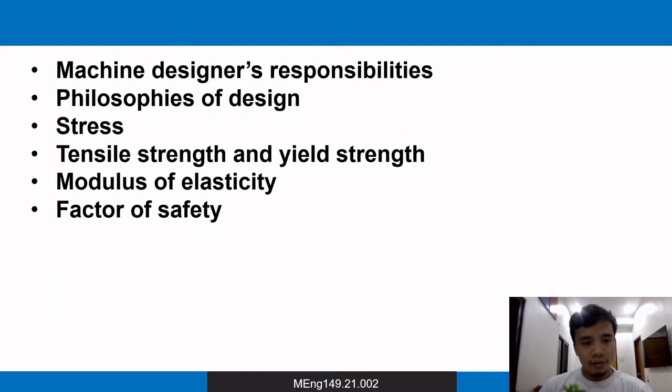Like the famous adage, necessity is the mother of invention. Every machine is born out of a real or imagined need for it. This idea may then evolve into a conception of methods and process in order to accomplish the purpose.

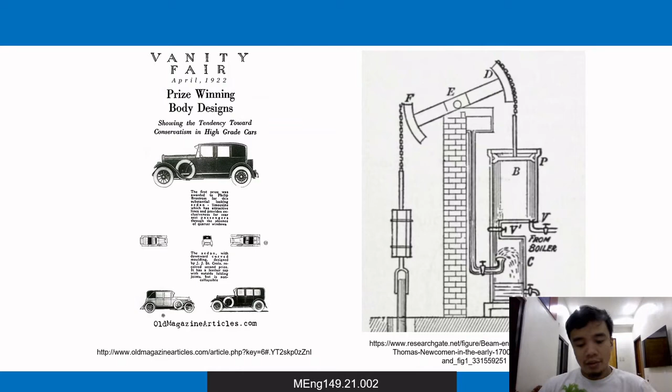What follows may be the arrangement of parts, the location and lengths of the links, which may include the kinematics of the machine, which only considers the motion of all the linkages and parts of a mechanism or machine, as well as the basis for gears, bolts, springs, cams, and other elements of machines.

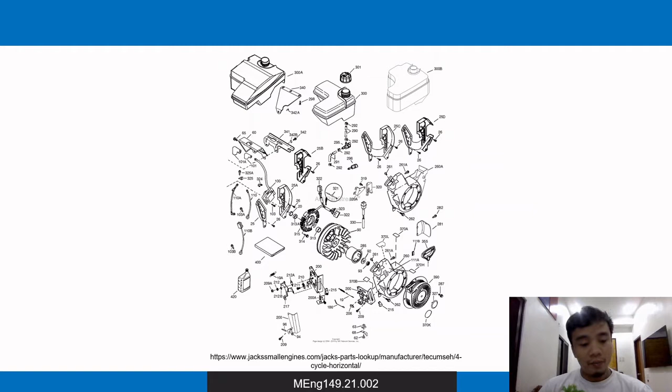The practice of designing is applying a combination of scientific principles and judgment based on experience. In other words, it is a combination of theoretical and empirical knowledge. Theoretical is what we read in the book, and empirical is based on experience or experimental data.

We always think of an invention as something or someone who starts from scratch and creates a new design and machine. What we don't know is that even though the inventor has created a machine we have never seen before, they use ideas that have already been known, in combination with other components and concepts that are already available.

Most designs follow a pattern familiar to and typical of an industry, whether it's a car, a sewing machine, a washing machine, or a refrigerator, seemingly similar to the previous one.

So, in other words, in the design, while there are improvements, the new versions or new models are seemingly similar to the older ones.

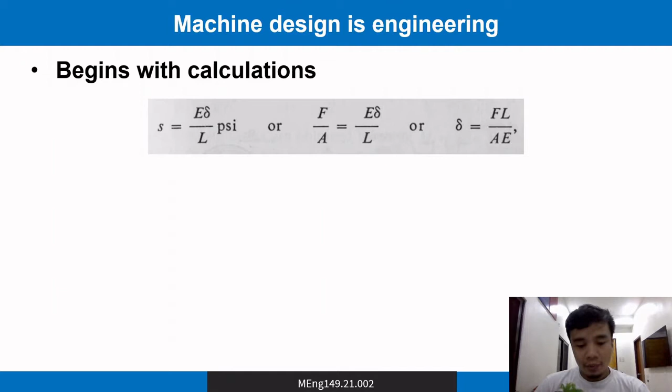Then each element is designed so that it will perform its function without failure. In doing so, we use the principle of strength of materials. So we have completed the course strength of materials, and the knowledge you have gained will be used or applied in solving engineering problems.

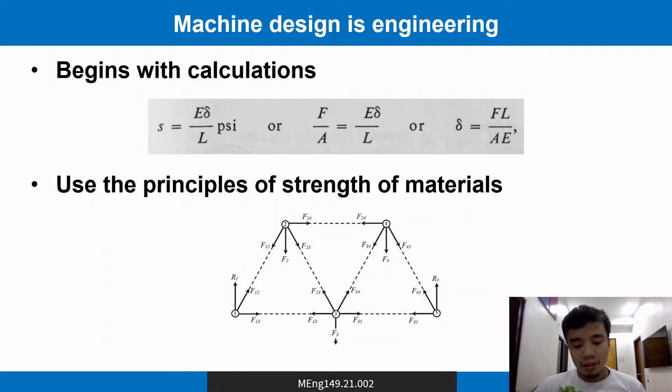In this machine design course, you will use these principles to find suitable dimensions of machine elements, and in the process, the designer does a stress analysis. This stress analysis will involve designing the various parts of the machine elements that are subjected to maximum stress.

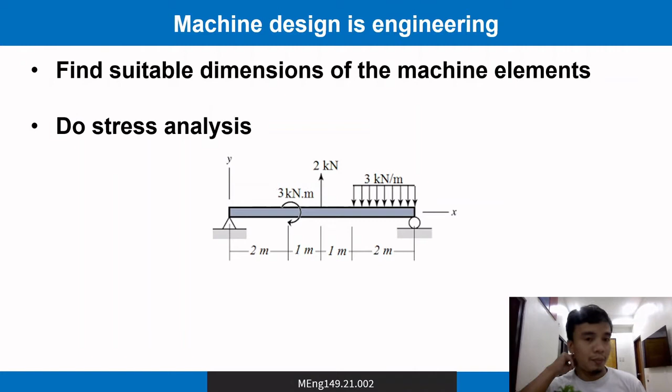Stress analysis is an essential process or part of machine design. But most important is the judgment, since it is seldom possible to use theoretical equations to determine and adapt the result right away.

So the designer must use their judgment to decide if the calculated dimensions and type of material suggested from the book are practical accordingly in real life. It is in the prerogative of the designer to judge if the calculated figures are practical in real life.

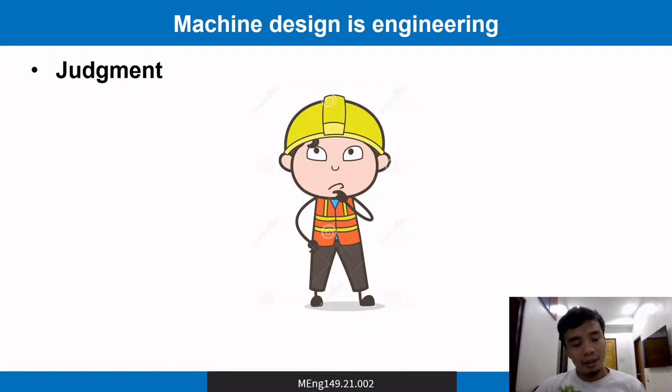So now let's go with stress. This is already known to you from your previous materials, and you'll be encountering it most in this course. In this course, the term stress refers to the unit stress, which is measured in pounds or kips per square inch.

A kip is a unit of force that is equivalent to 1,000 pounds. Kip is actually a contraction of kilopound, so instead of saying kilopound, it is contracted into kip.

So these are for tensile stress and compressive stresses. Stress is denoted by small letter s, and tensile and compressive stresses are denoted with T and C respectively. Since stress or unit stress is equal to the applied force or applied load over the cross-sectional area, the load is denoted by F and the cross-sectional area is A.

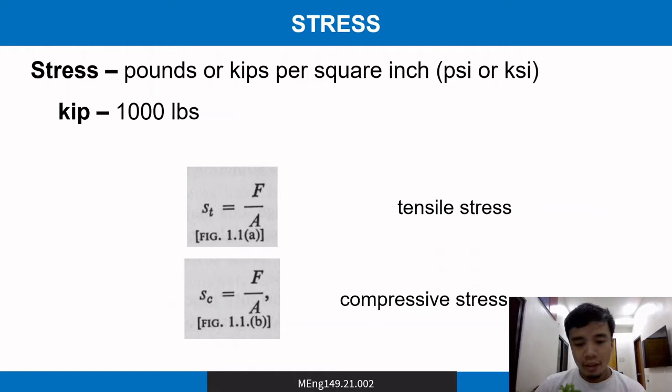Our general assumption here is that the line of action of the load F or force is at the center of the cross section. Throughout this course, we'll be assuming that the location of application of the load is at the centroidal axis, meaning no scattering of loads along the cross section—it will be concentrated at the centroidal axis.

In the above figure, when a bar is in tension, the force F or load F is applied outward and tends to elongate the bar. This tendency of elongation has effects on the area and geometry of the bar. In the figure below, the load F is applied inward, so the forces tend to shorten the bar.

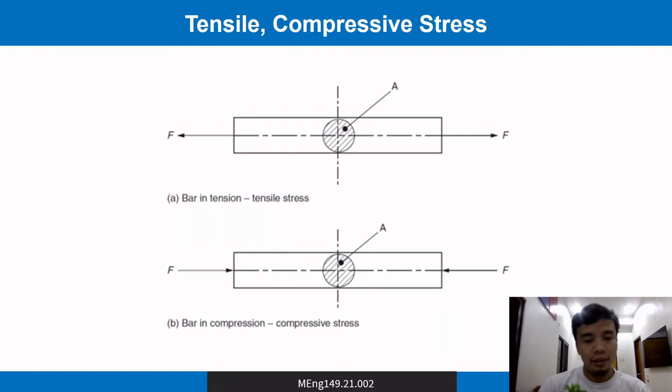Now let's take a closer look at the bar when applied with compressive or tensile loading. The bar or any member, when subjected to the action of a force, will be deformed. As you can see, the bar was applied with tensile loading—exaggerated here—there is an effect on the geometry, particularly the cross-sectional area of the bar.

This deformation not only affects the length, having the tendency to elongate the specimen, but also the area of the cross-section. A specimen subjected to tensile loading elongates and decreases its cross-sectional area. In contrast, when subjected to compressive loading, the specimen shortens and the cross-sectional area tends to increase.

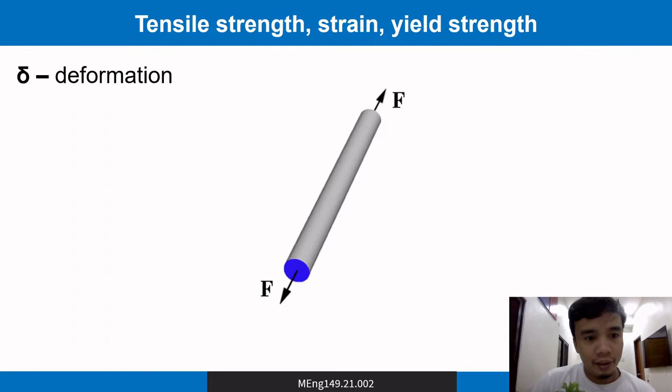This change in length is called deformation, denoted by the Greek letter delta. The deformation per unit length of the specimen represents a percentage increase or decrease in length, and it is delta L over L naught, where delta L is the total elongation and L naught is the original length of the specimen.

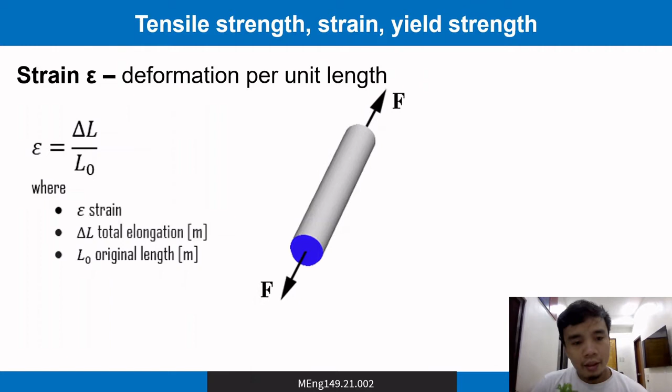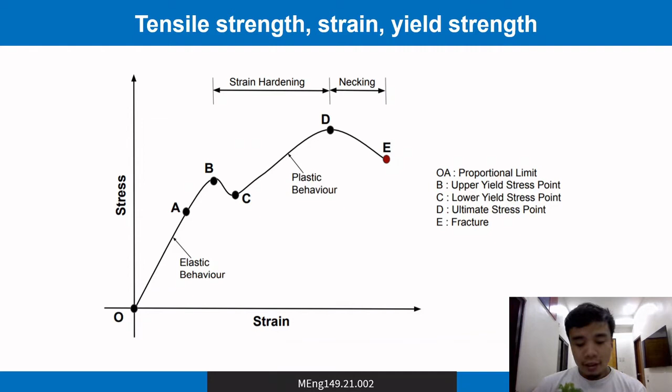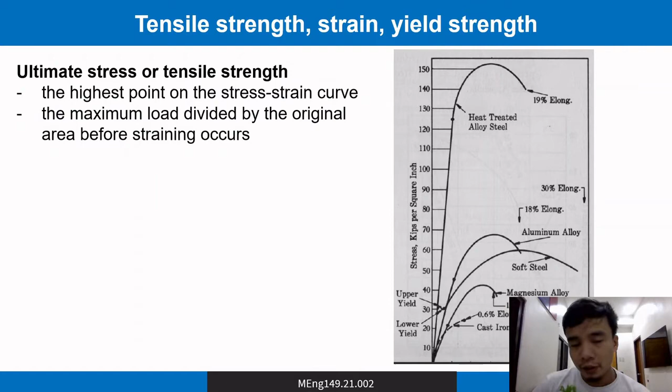The highest points in the curve, as mentioned earlier, are the ultimate. The specimen or material will sustain deformation, but it will not break. The end point of the curve is the so-called fracture or breaking point, where the specimen deforms outward—also called the failure point.

So let's go back to the stress-strain diagram of materials. We have the so-called elastic limit. The elastic limit is the maximum stress to which a specimen may be subjected without permanent deformation. The line below this elastic limit can be linear or not.

There's a terminology or parameter in the stress-strain curve that is coincident with the elastic limit, the so-called proportional limit. The stress is proportional to the strain. So at or below the elastic limit, the stress can also be proportional to the strain.

But not all materials will proceed with deformation before going through a proportional limit of deformation. So for the elastic limit, as you can see in the stress-strain diagram, the curve can be the proportional limit plus there are materials that will undergo significant deformation, but they can still return to their original length.

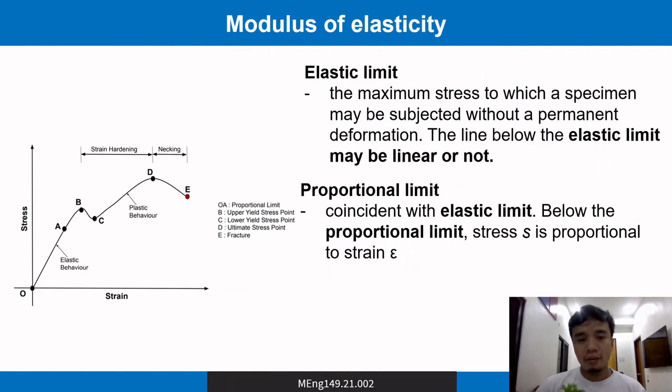Since stress is proportional to strain, if we express it as an equation, there must be a proportionality constant. The proportionality constant below the proportional limit is assigned as a constant, the so-called modulus of elasticity. This is represented by the equation: stress equals the modulus of elasticity times the strain. Since strain is the ratio of the elongation or deformation to the original length, it is basically dimensionless.

Therefore, the unit of the modulus of elasticity is the same as the unit of stress, such as KSI or PSI. Let's take a look at the equations for total deformation. Stress is equal to the modulus of elasticity times the strain. Since strain equals deformation over the total length, we have S equals the modulus of elasticity times delta over L, where delta over L is the strain.

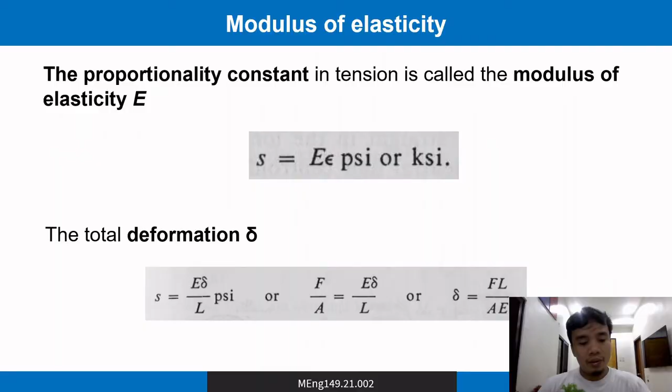With regards to modulus of elasticity, it is important to be familiar with the values for commonly used engineering materials, such as steel and wrought iron, which are common values used throughout this course and also in practice.

For steel, the modulus of elasticity in tension or compression is 30 times 10 to the power of 6 psi, or 30,000 ksi. The modulus of elasticity in shear or torsion, denoted by letter G, is 11.5 times 10 to the power of 6 psi. This is for steel.

For wrought iron, which is also another common engineering material, the modulus of elasticity in tension or compression is 28,000 ksi, while in shear or torsion it is 10,000 ksi.

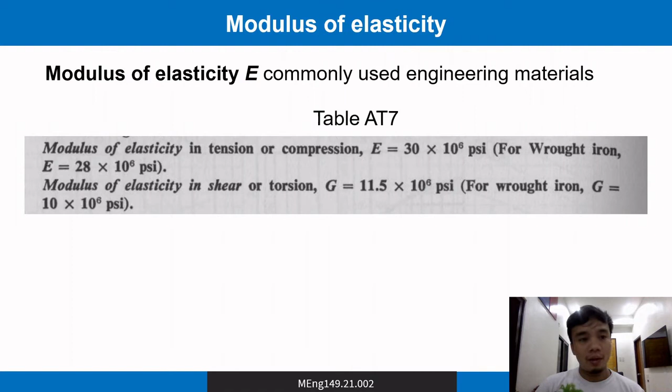Now there is a terminology that you may first hear in machine design, and this is the factor of safety, or otherwise called the design factor. This is denoted by the letter N. It is defined as a number that is divided into a criterion of strength in order to obtain a design criterion. This will be hard to grasp for you as of now, but let's talk about the concept of the design factor.

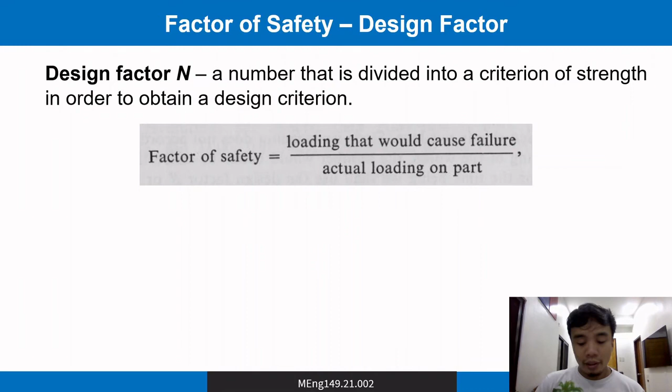The concept behind the usage of the factor of safety is that in design we cannot use the value of the ultimate strength or the yield strength of that material in the calculations right away, without using a factor, because the subsequent results when using the ultimate strength or yield strength would be too high risk for failure. So the designer should assign values below the ultimate strength or yield strength so that the design would be safer. This design stress is expressed by these equations.

This is denoted by S sub D. Ultimate strength and yield strength are divided by the design factor. Hence, the design stress when basing from the ultimate strength is represented by this equation, and the design stress basing from the yield strength is represented by this equation.

So you can see here that there are two design stresses - the design factor based on ultimate strength and the design factor based on the yield strength, because the material has two possible maximum strengths.

One is the ultimate strength, which is the value of the strength of material before failure occurs, and the yield strength is the strength of material where irreversible deformation of that particular material occurs.

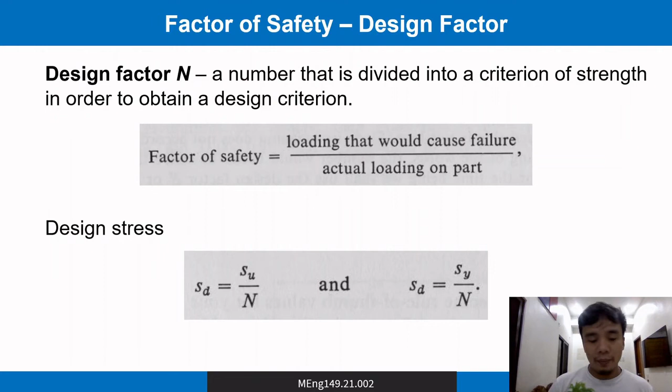There are criteria that must be considered in designing what design factor to be used. So take a look at Table 1.1. This can be located in page 20 of the reference book. Here in this table, there are four specific criteria in selecting the design factor.

If the type of loading or the foreseen type of loading for this element is a dead load, then there is a corresponding design factor, which also varies for the type of material, whether it is steel, ductile metal, cast iron, or timber. So for repeated one direction gradual or ungradual loading, there's a corresponding design factor for that. Also with repeated reverse gradual, and shock.

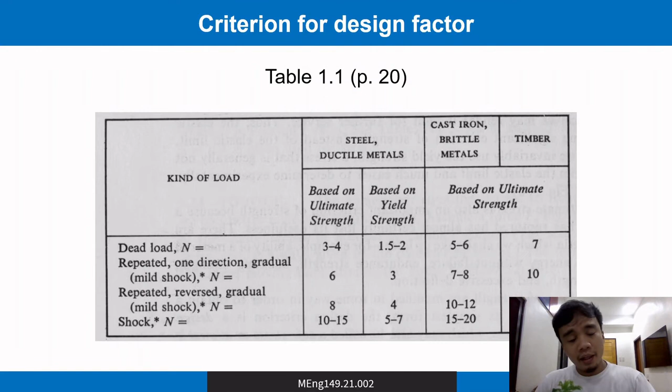As you can see here, as the type of loading involves a higher degree of shock into a machine element, the design factor increases. These uncertainties affect the magnitude of the design factor. So designers cannot be certain as to what extent of the machine element's life can handle a particular type of loading.

So whether this machine element, throughout its lifetime, will only be repeated - what if there could be a shock load in its lifetime? So those are the uncertainties that need to be considered by the designer. With regards to loading, is there a possibility of shock loading, or will it perpetually carry repeated gradual loads? Is the material completely homogeneous that we can assume uniformity of resistance? These questions constitute the uncertainties associated with designing machine elements.

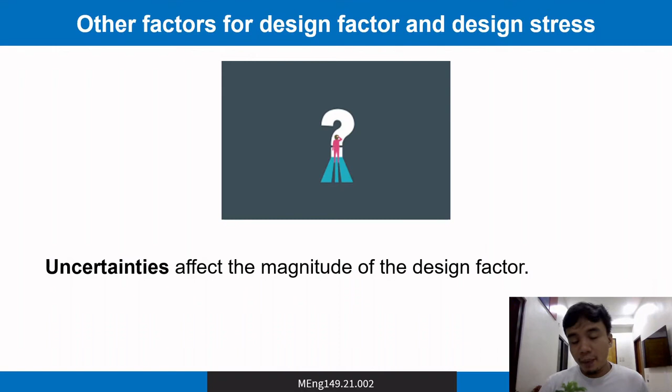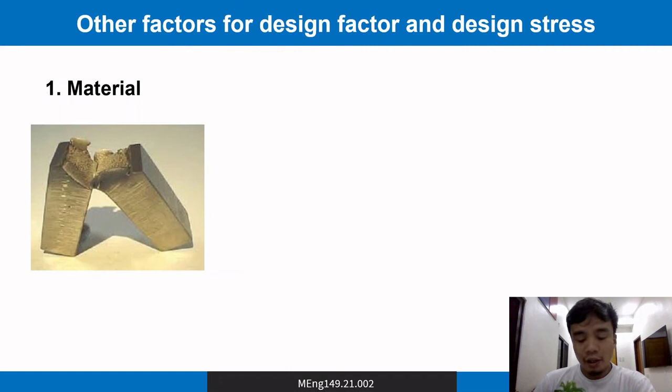Below are the factors that affect the magnitude of the design factor. First is the material - complete information about the material is not generally available. This is true in practice. There will be possibility of internal flaws, improperly controlled treatment of the metal. If the designer is not completely certain with this material information, a higher design factor is recommended.

Second, the size effect. It is known that failure of large parts occurs at lower stresses.

Thus, it is suggested to use a higher factor of safety for large sizes of the same family of materials. So for bigger sizes of a particular machine part, even with the same family of materials, a higher design factor is recommended.

Next is the type of loading. As discussed earlier in Table 1.1, the criterion for that is the type of loading. Determining the service loading throughout the lifetime of a machine is practically impossible. As posed earlier: will the type of loading be consistent throughout its lifetime? Is there a possibility of shock load? Those are the uncertainties with regards to the type of loading.

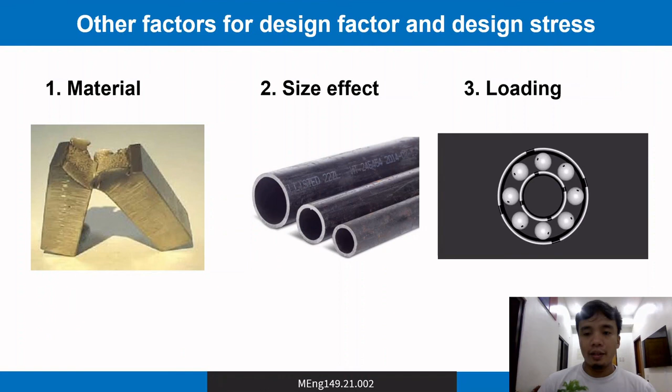Machines will undergo different types of loading in its lifetime. While estimates are essential, deciding based on experience is way more practical. So when the nature of loading is known in some detail, a lower design factor is suggested. Otherwise, the designer should decide on a higher design factor.

The computed average stress can be viewed with considerable confidence, especially for simple stresses, because simple stresses are relatively easier to compute due to the nature or geometry of the elements, or the location of loading applied to these elements. However, for elements with complicated shapes and thus non-uniform stresses, uncertainty increases. One may determine stress experimentally, but the figure may deviate significantly or may not exist in the design.

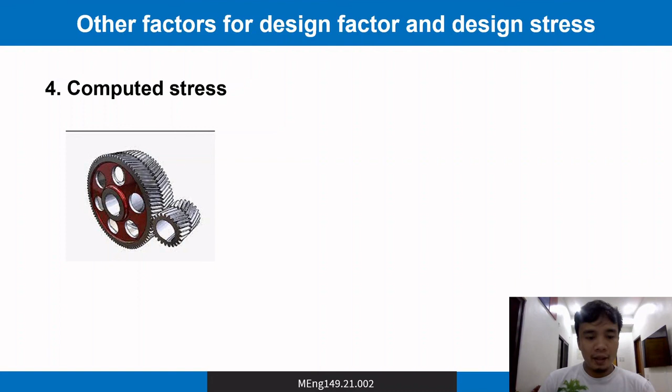So, when there is uncertainty regarding the confidence of the computed stress, especially when dealing with complex shapes, non-homogeneous materials, and the location of loading, it is recommended to use higher design factors.

Next is the environment. Machines are typically operated in a dusty, corrosive, or oily working environment. These environments may result in cracking, roughened, or smoothened material surfaces, which could considerably affect the material integrity. So, if throughout the lifetime of this machine element it is used in these dusty or corrosive environments, a higher design factor is also suggested.

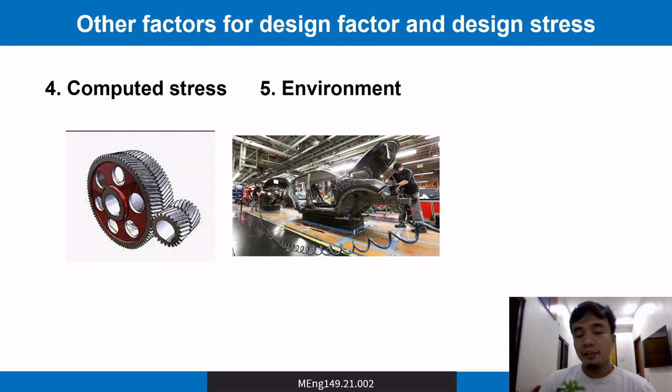Next is the inspection. The inspection revolves around the thoroughness and strictness of the material inspection before it is rolled out for usage in the manufacturing of these machine elements. This could also affect the magnitude of the design factor. So if it is known that the quality of inspection is not high, a higher design factor is also considered.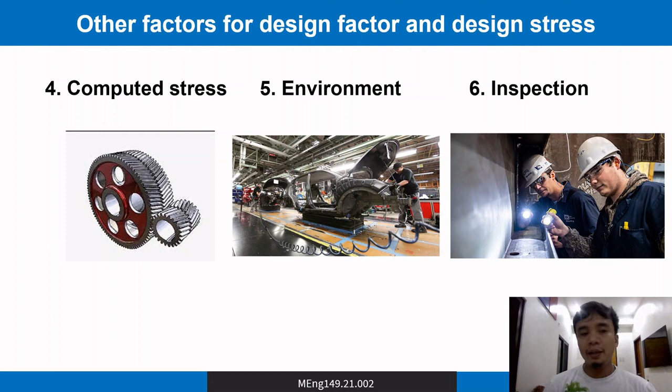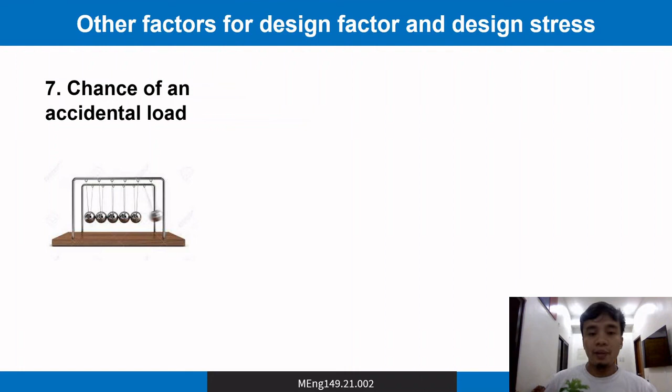Danger to life or property. Higher design factors are desirable if there is a high chance of life or property being endangered.

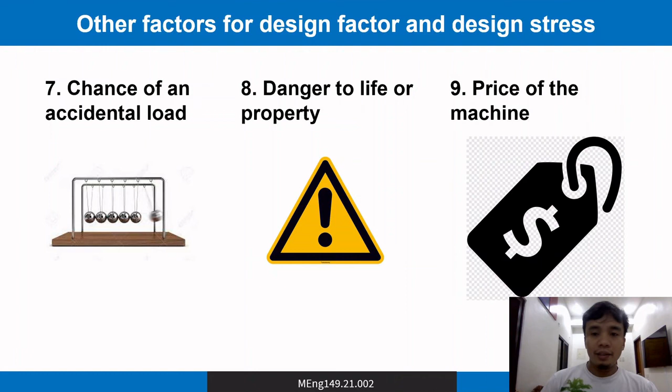And lastly is the price of the machine. Sometimes cheaper machines have lower factor of safety to reduce cost of materials and production.

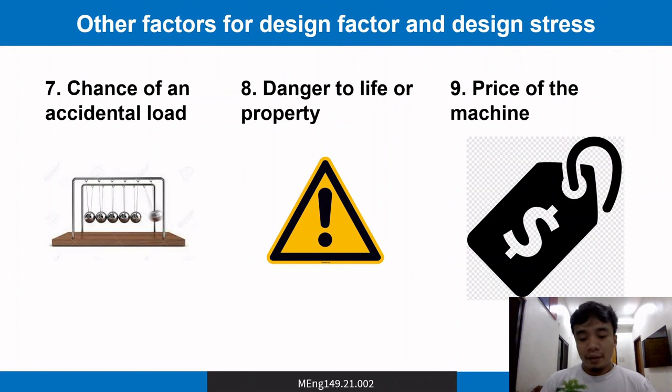With all these factors mentioned regarding deciding the design factors, the end point here is the judgment of the designer. So, if these design factors are considered practical, is the designer overestimating the possibility of these occurrences, or is the designer underestimating the possibilities? So it is in the judgment, and this judgment refers to the experience of the designer.

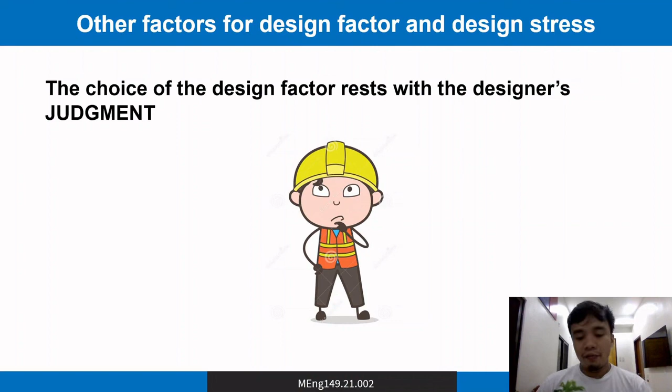This experience may also be derived from their previous design experience, from actual experience in the machine shop. As we go on in this course, you will observe that each machine element has its own suggested design factor, and that of course considers some of the factors mentioned earlier.

A problem may give these design factors based on the type of loading, or the problem shall state the type of loading throughout its lifetime, and thus we will look up these tables of suggested values. These are the references that you'll be using in the problems for this course.

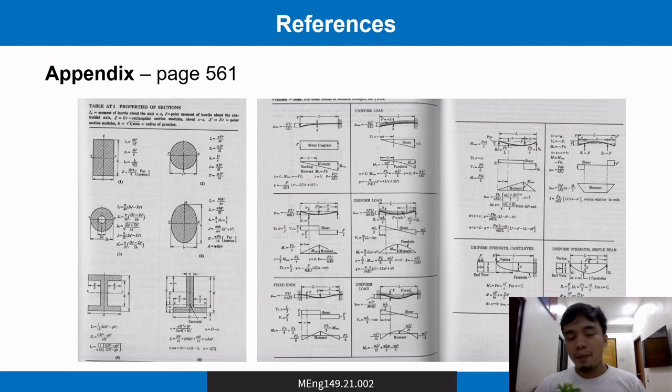In the appendix starting on page 561, you will see different tables such as Table AT 1, AT 2, and these tables represent the properties of the materials, and the corresponding equations that are essential in the solution of the problems. These are just some of the tables that we'll see in the appendix.

In my next video, I will demonstrate how to solve a design problem under this topic of simple stresses. So thank you for listening, and that's all for now.